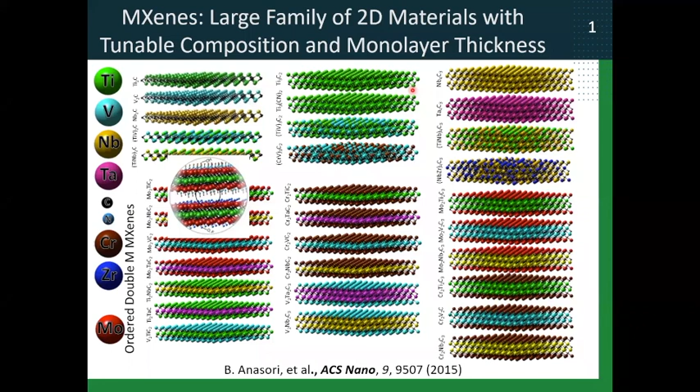We used modeling and molecular dynamics to measure mechanical properties of MXenes. This is what we started with about 6 years ago, and at that time there was no parameterized force field for MXenes.

Now we can use ReaxFF, but at that time we started to play with a combination of different potentials. For example, we used embedded atom potential for titanium-titanium interactions. Titanium-carbon interactions we described by a combination of Lennard-Jones and Axilrod-Teller three-body potential. And for carbon-carbon, we used a very simple Lennard-Jones potential.

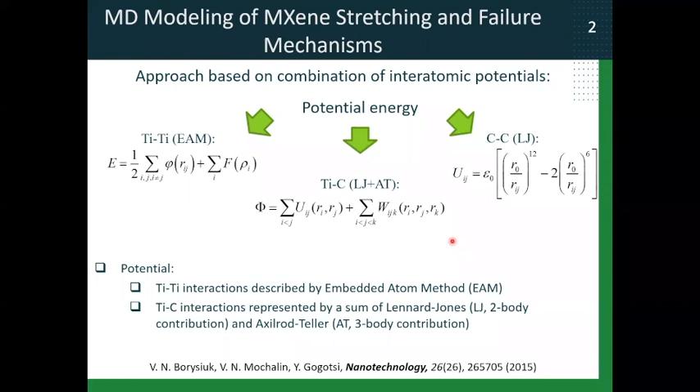So this was our functional for potential energy in MXenes, and this is our simulation setup. We used quite large sheets of MXenes, 38 by 33 nanometers. For simulation it's quite large, because the number of atoms is around 50,000 to 90,000, depending on which MXene we use. Simulations were done in an NVT ensemble, using our own in-house written C++ code.

So it's a massively parallel code. Mechanical properties were calculated using the virial theorem. For example, stresses were calculated using this expression. This is a very well known procedure.

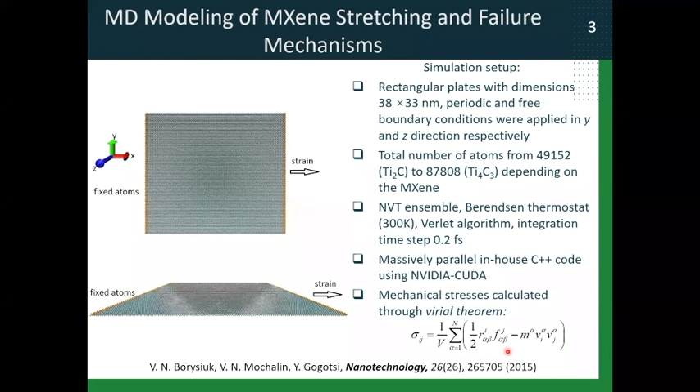The advantage of using computational modeling to simulate MXene behavior is that you have full control and full information about what is going on in your material at the atomistic scale. So here I show a movie of stretching of 3 different MXene monolayers.

Titanium 2C is on the left, then titanium 3C2 in the middle, and titanium 4C3 on the right-hand side. And you can see, even by looking simply at how they fail, of course when you stretch them, eventually they fail. The failure mechanisms are very different between these 3 MXenes.

Now, they all have the same elemental composition, it's titanium carbon MXenes, right? And the only difference between them is the variation in monolayer thickness. As I said, MXenes allow precise tuning of this.

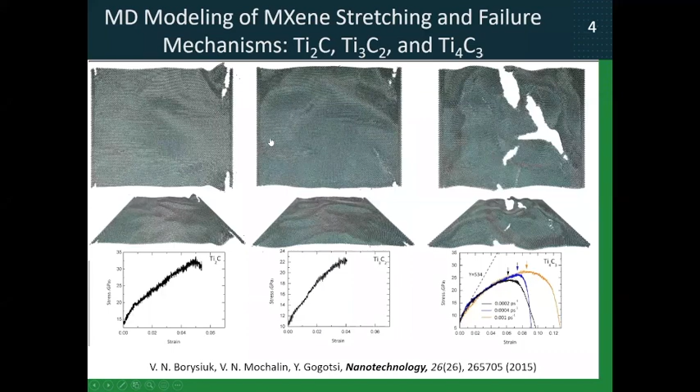And so you not only can use this modeling to get information about failure mechanisms and mechanical properties of these MXenes, but you can also use the MXenes as models of materials with precise control of monolayer thickness. So this is a very interesting aspect, which I will return to again and again in the talk, that MXenes we can also use as convenient models for fundamental studies of any property which depends on the monolayer thickness, of course including mechanical properties.

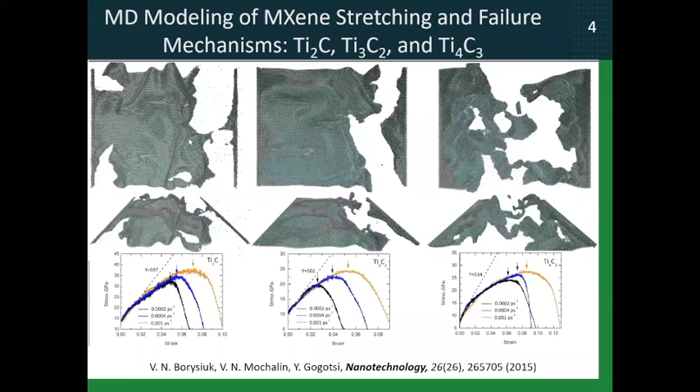Since we can measure stress and strain during this in silico experiment, we can produce stress-strain curves, and these curves give you information about mechanical properties. For example, the slope of the initial part gives you Young's modulus, and you can see the values here for 3 different MXenes.

Behavior of these stress-strain curves at different strain rates tells you something about elastic and plastic deformations of the materials. And as you can see from these curves, at lower strain rate, the materials behave more plastically. So this is what we usually observe in metals.

And this is consistent with the basically metallic nature of MXenes, because they also offer very high conductivity, and electron density at the Fermi level is very high. So this is another illustration that they behave basically as metals when you deform them, especially at low strain rates.

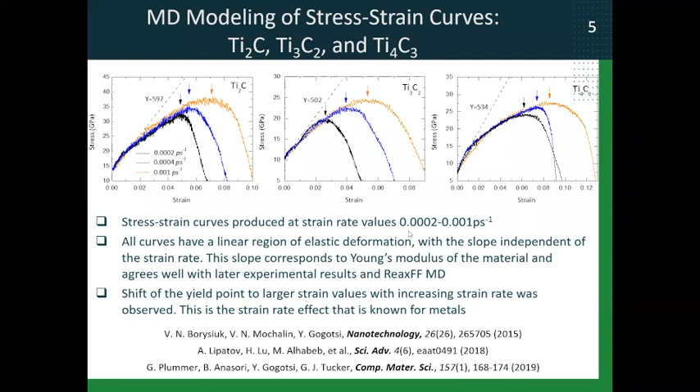So you can get information about Young's modulus and failure mechanisms, and the values of Young's modulus that I showed in the previous slide were later confirmed by ReaxFF modeling that Yuri presented last time, and also by experiments done by his group in collaboration with a group at the University of Nebraska-Lincoln.

Those were the first measurements of Young's modulus on monolayer MXenes, and the values were surprisingly close to what we predicted using this simple molecular dynamics modeling.

The next thing we also worked on using modeling was bending rigidity of MXenes. The concept of bending rigidity is intuitively very simple: if you have a very thin material, you expect it to deform very easily when you try to bend it. And when you have a thicker material, it will take more force or more energy to bend it.

So this is bending rigidity in simple words. If you want a way to calculate it, here is the equation which allows you to do so. D is bending rigidity here. And if you know the force F and displacement W, and also the length of your plate, you model your MXene monolayer as a plate, and you can calculate D, the bending rigidity, using this equation.

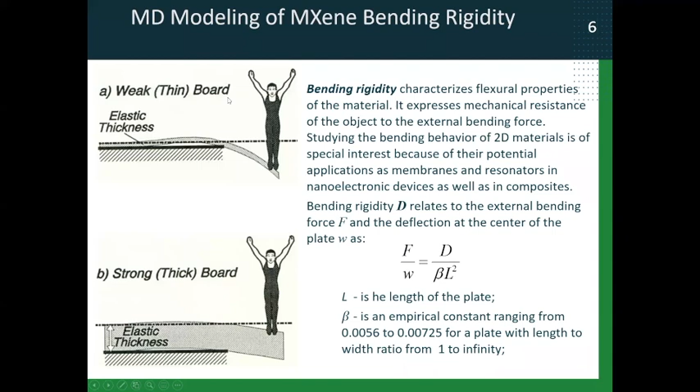And if you look at these numbers, they are much, much higher compared to graphene. Well, that is expected, graphene is a very flimsy, monoatomic layer thick material. But even compared to molybdenum disulfide, the numbers for MXenes are much higher. So MXenes are predicted to be much more rigid than other 2D materials.

And this is important, because in certain applications, especially when you want your material to maintain high frequency of vibrations for sensing, graphene is not a good choice, because graphene cannot maintain high frequency of vibrations. It will vibrate at very low frequency because it's a very flimsy material. But MXenes may be better materials for that, because they have much higher bending rigidity and are therefore expected to maintain a much higher frequency of vibration. So again, this is important for sensing.

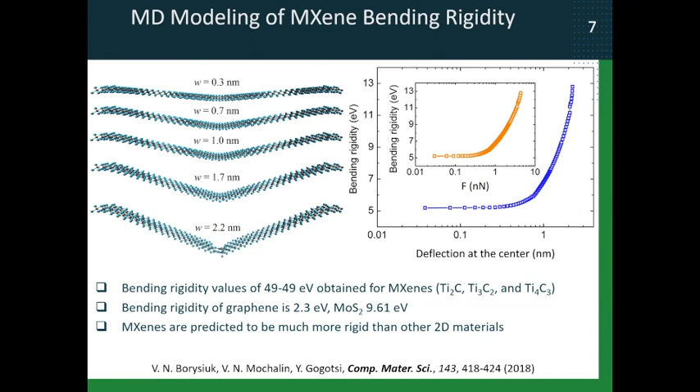So this is the part that I wanted to show you related to modeling. Now we are going to switch to experiments with MXenes.

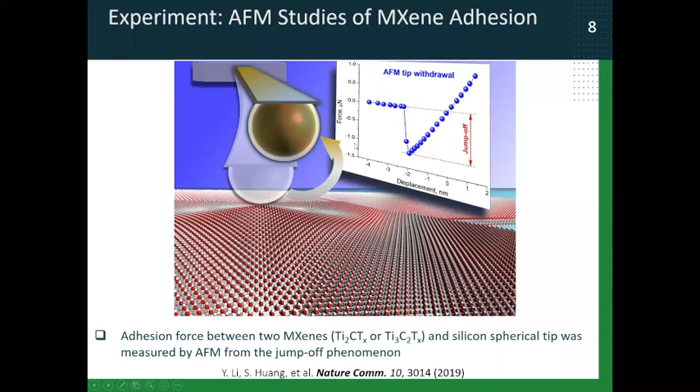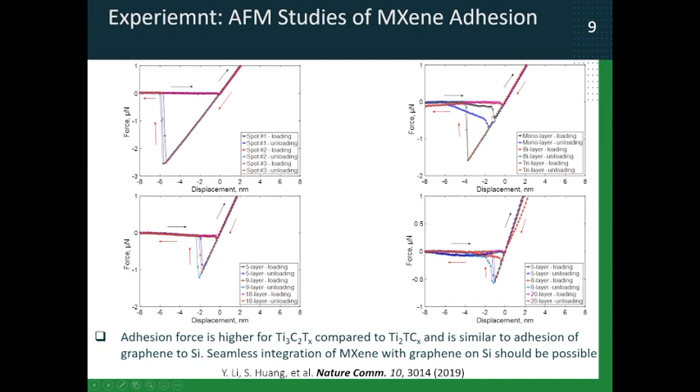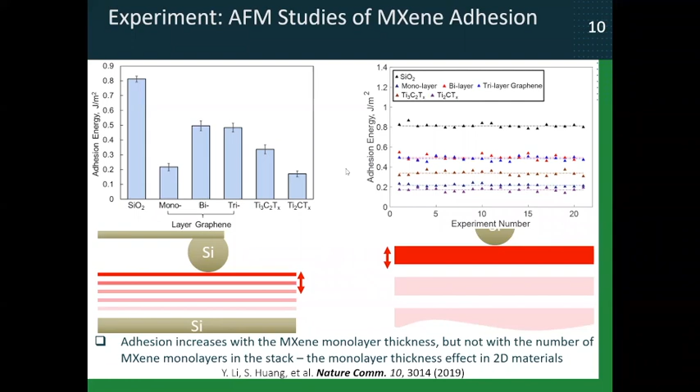We also studied properties of multi-layer MXene films, which we fabricate using interfacial film deposition. And the way we studied mechanical properties of these films was by using a device called a push-to-pull device in SEM with a PicoIndenter.

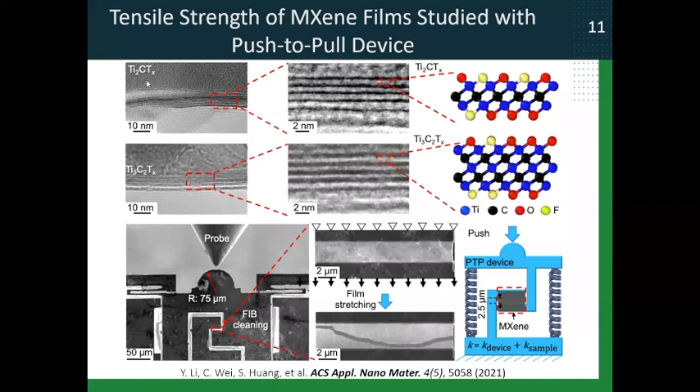So we started to look into how these stacks of monolayers fail and why they demonstrate this behavior. And again, we found out that the failure mechanism is basically a layer by layer failure instead of a concerted failure of all monolayers in the structure at once.

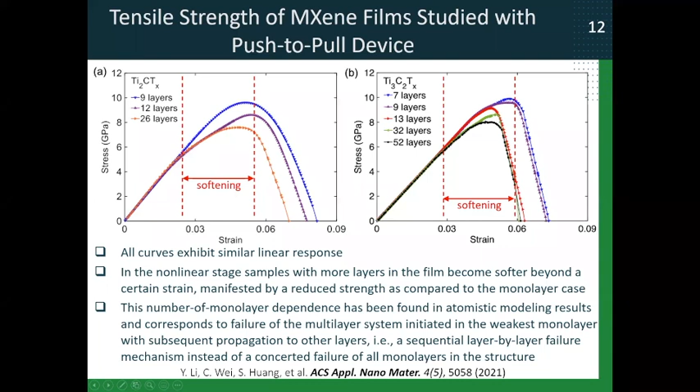And this was a reason why instead of sharp degradation of the sample, it just becomes softer, but still can maintain mechanical load. This is interesting because it tells us that we can fabricate multi-layer structures based on MXene, and we expect that these structures will demonstrate quite high mechanical properties even when they start to fail, because they don't fail all monolayers at once, they fail in sequence. We can expect that even when they start to fail, they will still maintain quite high mechanical strength.

So you know the mechanical properties of one monolayer, then you stack 10 of them, you expect that the property will be 10 times more, right? So this is additivity. But what happens with real materials when you stack them is your resultant property is usually much less than the additive property. And this is what was observed for other 2D materials.

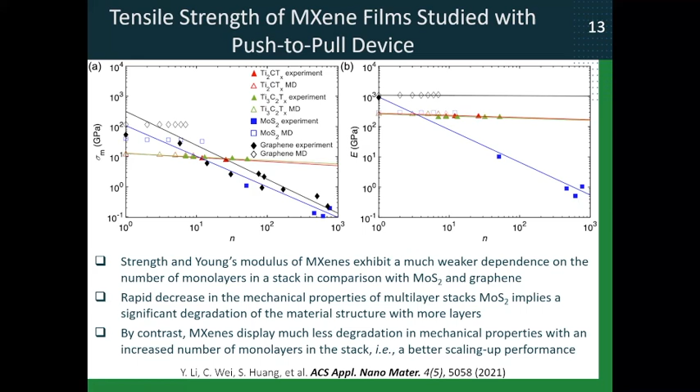And then again, we used modeling to understand the atomistic details of what happens in these stacks. We used ReaxFF molecular dynamics, and we modeled the stacks of MXene monolayers with different numbers of layers, two different MXenes: titanium 2C and titanium 3C2, with different numbers of monolayers. And again, we can calculate stress strain curves.

And indeed we observed that in the stack, say for example, when we have 10 layers in the stack, the failure starts in one layer first, and then it propagates to the next layer and the next and the next. So this is what is responsible for this softening behavior, where your material becomes softer, but doesn't fail completely. Okay, so it was confirmed with modeling at the atomistic scale.

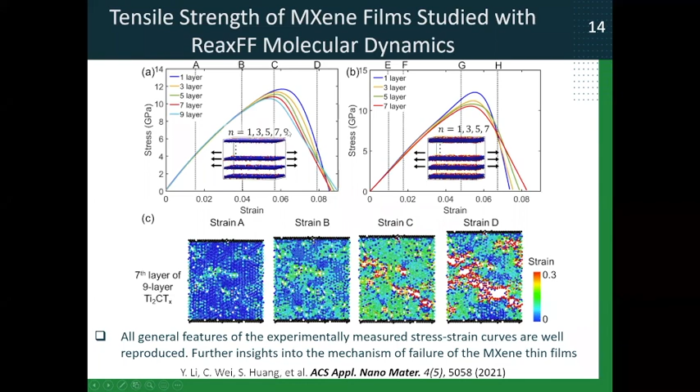And then finally, when we looked closer at the edges of the forming cracks, we found another interesting effect. And that brings us back to the very first slide about MXenes, when I said it's important to remember that the surface is coated with functional groups. And here we observe this effect of functional groups on mechanical properties.

So what happens is this: when you stretch MXene and it starts to break and you form the crack, then oxygen-containing groups, which are attached to titanium atoms - oxygen is a two-valent element, it prefers to form two bonds, right? When you start to separate titanium atoms between the edges of the growing crack, what oxygen does is it basically connects one titanium atom on one side of the crack to another titanium atom on the other side of the crack.

And in this way, it also maintains mechanical stability of this material. So this is another reason which may lead to softening behavior, but not abrupt failure as you would expect for graphene, for example, or other 2D materials which do not have these functional groups on the surface. So the presence of functional groups on the MXene surface becomes important in the mechanisms of failure of these materials. Okay, so this is another insight from modeling.

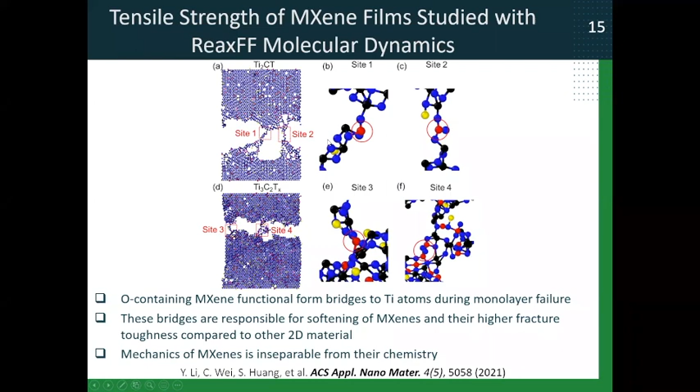These are the data we observed when we tested these films in dry nitrogen atmosphere. I have to tell you this first: when we tried to test these films in just ambient air, nothing interesting happened. They degraded fast and the performance was nothing impressive. But then when we switched to dry nitrogen atmosphere, we started to observe very interesting effects.

Here is the coefficient of friction for bare silicon without MXene. And here is what happens when we deposit a thin layer of titanium 3C2 MXene on that silicon wafer and test it. You see that when we deposit MXene on silicon, the coefficient of friction after initial run-in drops below 0.01 and stays at that value for the whole duration of testing, until the coating eventually fails here at around 3000 seconds in this case.

This value below 0.01 corresponds to superlubricity. So this is the coefficient of friction of this MXene film, and this is the coefficient of friction of just bare silicon. And then we also coated

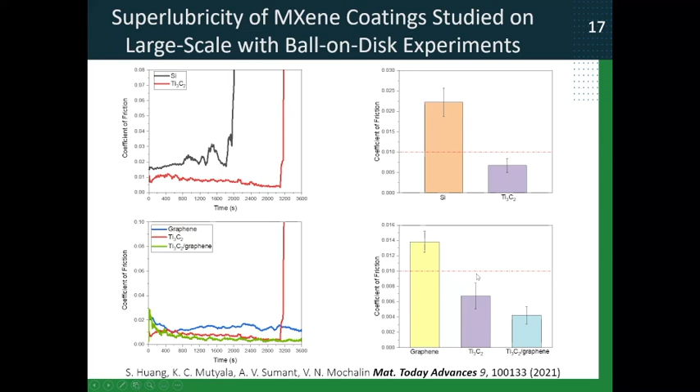MXene film with a film of graphene, and interestingly, we observed the same superlubric behavior. Now it's this green curve, but the film maintained its performance for much longer time compared to the original film. So again, this is the coefficient of friction of the MXene-graphene coating, still in the superlubric region, but now we also have other benefits.

For example, addition of graphene also reduces wear of the ball. So this is the wear of the ball which was rubbed against MXene coating. This is against silicon, of course, very large wear. MXene less, but still quite large. When we add graphene, the wear becomes very small.

So the data are also shown here: ball wear rate. MXene itself shows this value, but when we add graphene to it, the value becomes much less. And importantly, we still maintain the superlubric behavior offered by MXene. Graphene itself did not show superlubric behavior in these experiments, but when we coated graphene on the MXene film, we achieved both superlubric behavior due to MXene and very low wear rate due to graphene.

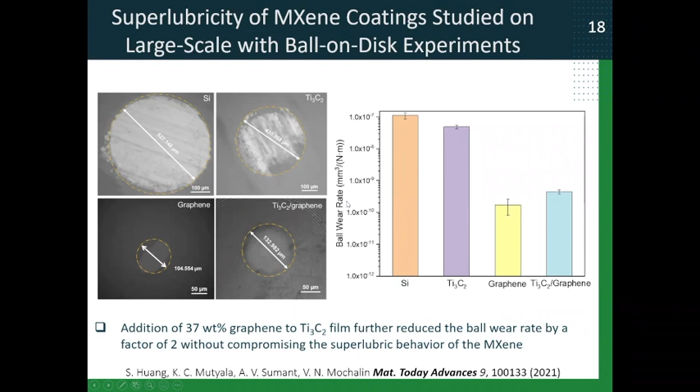So we observed, again, superlubric properties in the atmosphere devoid of oxygen and humidity. And addition of graphene also protected the MXene film and reduced ball wear rate.

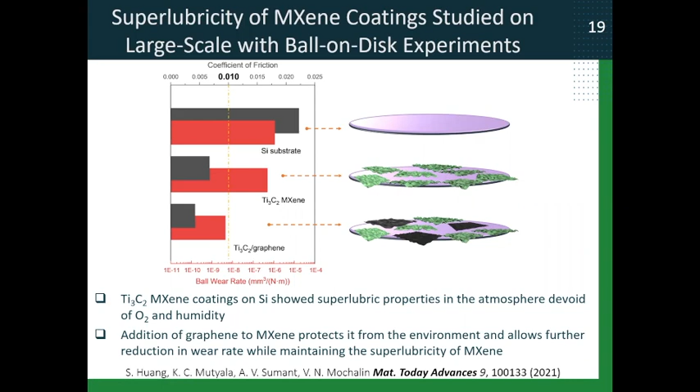Now, when I say protected, what do I mean? Well, this brings us back to understanding why MXene did not demonstrate superlubric behavior in just ambient atmosphere, because we hypothesized that MXene may actually react with humidity and air in the environment. Over the past few years, we looked extensively into the chemistry of these interactions, and it turns out that yes, MXene does react directly with water, which we call hydrolysis, and it can also be oxidized by air.

This is another big part of research activities in my group, which I am not going to cover, but if you are interested, just go and read these papers.

This is just an example of how to suppress hydrolysis. If you simply change water to a non-aqueous solvent, then your MXene becomes much more stable, even if you saturate this solvent with pure oxygen, compared to water. Even when you degas water with argon, MXene degrades quite fast in water.

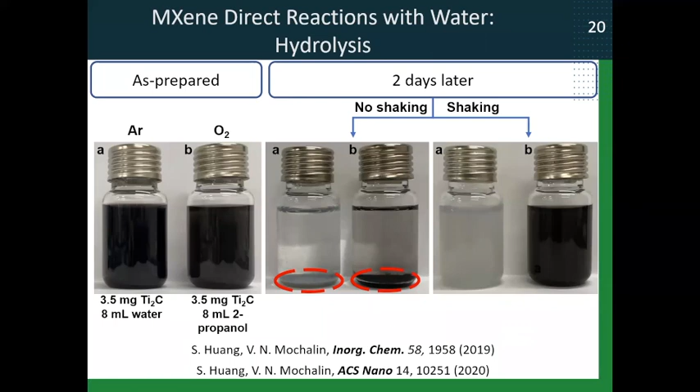So it makes sense to protect MXene with graphene if you want to use it in ambient environment.

Actually, when we published this work, it was around the time when Perseverance rover landed on Mars. I thought this is a perfect example where you can use these properties of MXene as a super lubricant, because when you are in space, you don't have water and you don't have oxygen in that environment. This is exactly an environment which is good for MXene to demonstrate superlubricity. Even on Mars, you don't have much oxygen and not much water to degrade it. So this may be one of the best materials for lubrication in space, where many other lubricants fail.

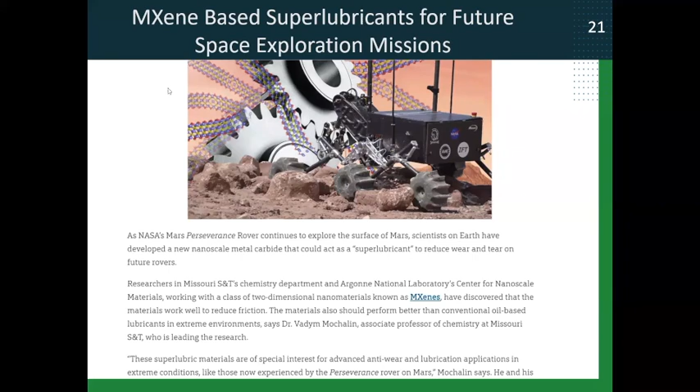This brings me to the conclusions of this talk. First of all, I introduced again MXenes as a large family of 2D transition metal carbides and nitrides, which opens up a huge playground in mechanics, tribology, and mechanochemistry of materials. Remember that we can do many fundamental studies, and they will benefit if we use MXenes for them, benefiting from precise tunability of monolayer thickness, elemental composition, and surface chemistry.

From the standpoint of applications, what we know now about MXenes is this: they have quite high Young's modulus and fracture toughness, and show better scaling up behavior compared to other 2D materials, which makes them actually interesting candidates for composites, coatings, basically any structural applications.

They also have a beneficial and tunable adhesion with other 2D materials and with silicon, which makes them ideal materials for fabrication of heterostructures for optoelectronic applications. Again, no stress due to mismatch in adhesion.

And finally, superlubricity of MXenes is very interesting because it's maintained in extreme environments, which makes these materials promising candidates for applications, say, in space exploration.

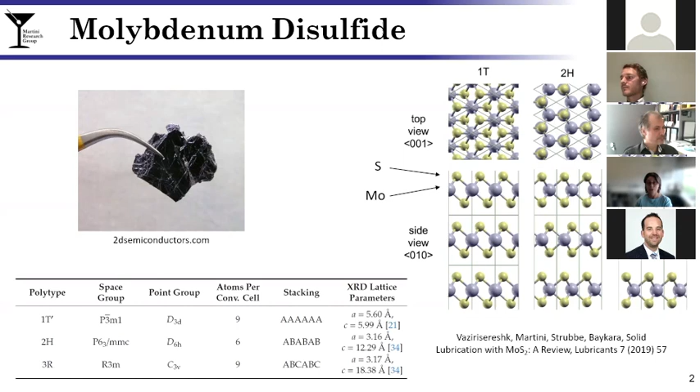But from a tribological standpoint, which is my main focus, the key feature of MoS2 is the layered structure. Like other two-dimensional materials, MoS2 has strong covalent bonds within the layers between the Mo and the S, and relatively weak interactions between the layers. This enables the material to slide, to shear relatively easily between those layers at the weak bonds.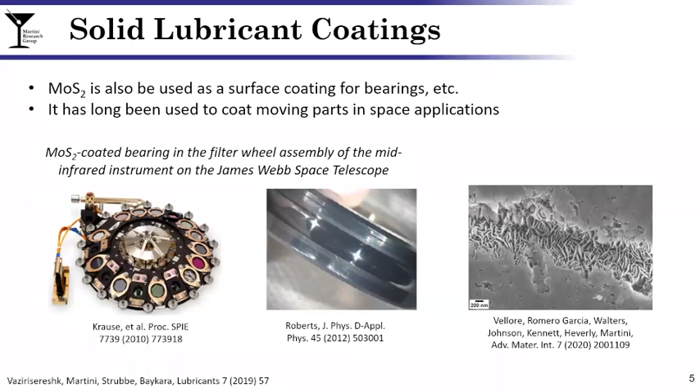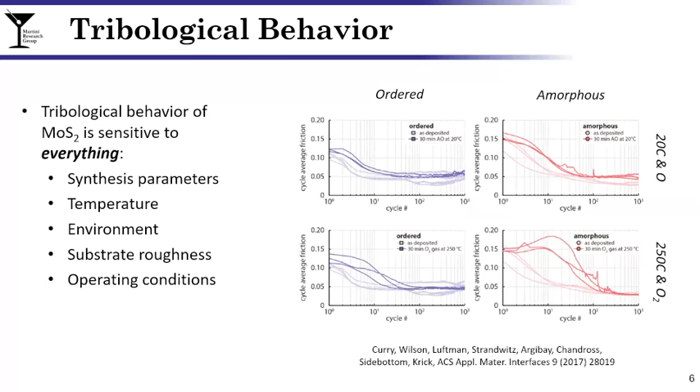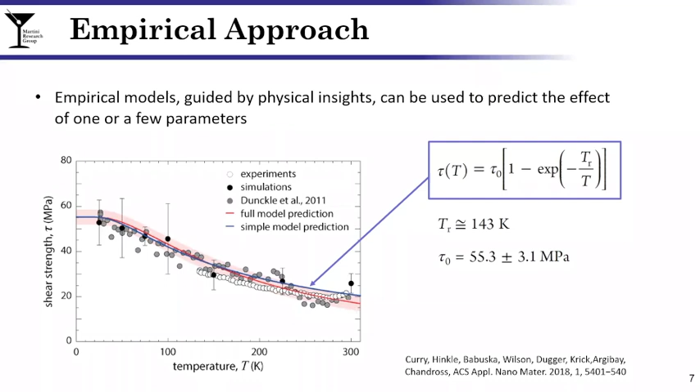However, to complement experimental measurements and empirical modeling, another complementary approach is to break down this very complex system into a fundamental single unit of tribology. If we think back to that bearing I showed a few slides ago, the actual contact is comprised of many different asperities. If we break that down and focus on just one single asperity, the premise is that if we can understand MoS2 sliding behavior at the single unit of friction, perhaps we can extrapolate that information upward and complement empirical modeling for design purposes.

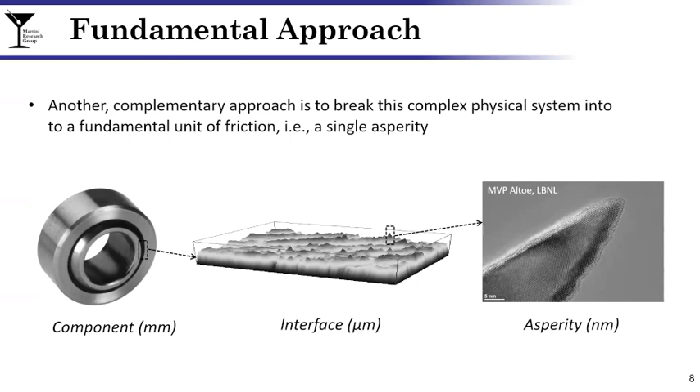In terms of research, single asperity studies are realized primarily using two tools. The experimental tool is the atomic force microscope, where we have a nanoscale probe sliding along the surface, and that nanoscale probe is your single asperity. I'll mention that the AFM results I'm showing today are from Rob Carpick at UPenn. The AFM experiments are often complemented by molecular dynamics simulations of the apex, or just the bottom of the tip, and the surface on which you're sliding. Together, these two research tools can be used to fundamentally understand friction at the atomic scale.

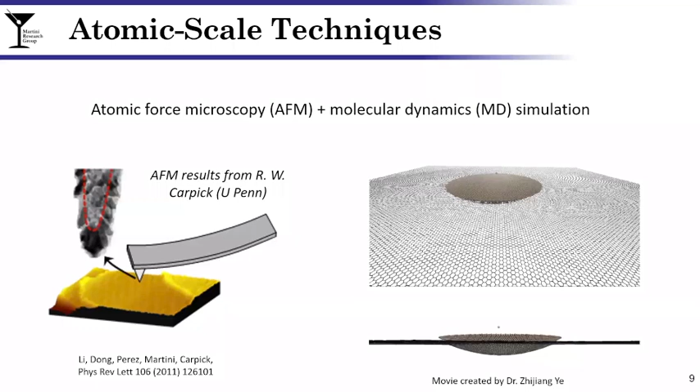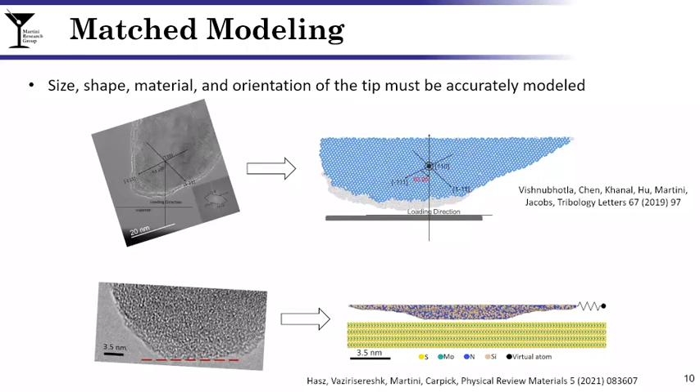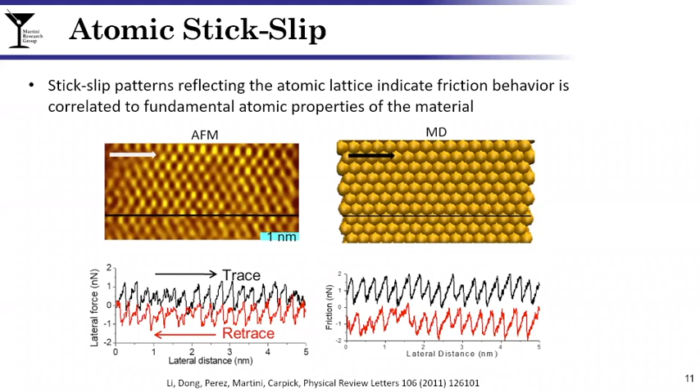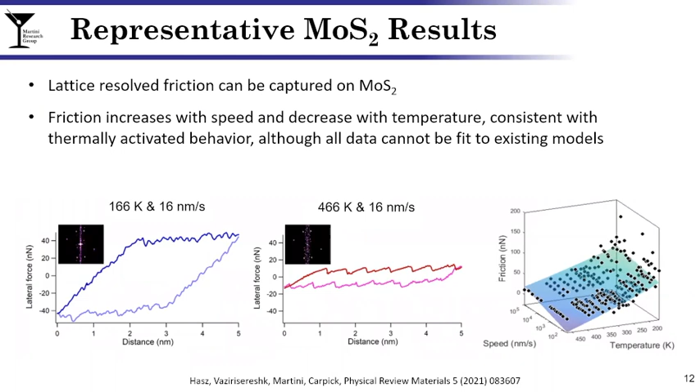We repeated this experiment in all the different possible sliding directions. We expected six low friction directions based on the six-fold symmetry of the MoS2 crystal structure. But instead, in both experiments and simulations, and on both bulk and monolayer MoS2, we saw only two low friction directions. This was quite confusing to us because we're trying to connect friction to atomic structure, and we see some seeming discrepancy here.

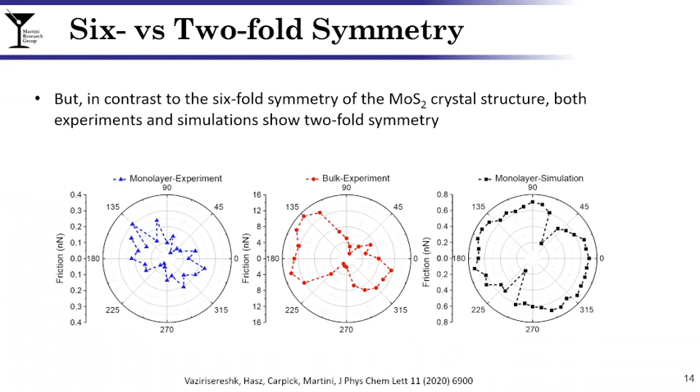To understand this, we looked at potential energy surfaces. These colorful schematics on the left show the potential energy of the MoS2 surface. The one on the left is the ideal structure, where red is high energy corresponding to the positions of the sulfur atoms in the topmost layer. You can see that there should indeed be six ways you can go from the center line and get low friction.

However, recall that friction is not just one material, it's two things sliding relative to one another. So we recalculated the potential energy surface using the model tip in the simulation and found a very different story. Specifically, the tip breaks the six-fold symmetry, leading to two directions of low energy corresponding to our two directions of low friction. So it seems that surface energy, something fundamental about the material, plays a very important role and potentially is a link between friction and the atomic nature of materials.

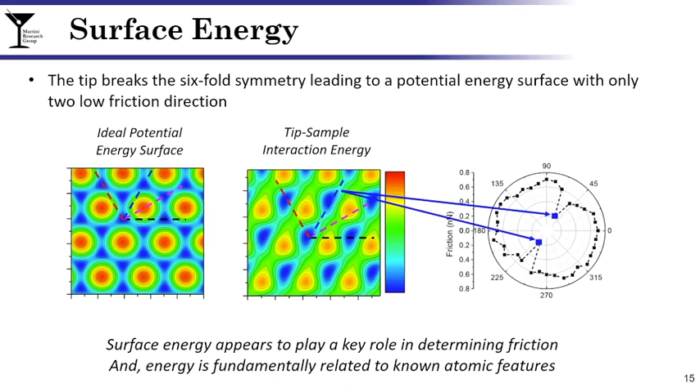To take this one step further, we did a study comparing MoS2 and graphene, or graphite. These are the two prototypical two-dimensional materials, and indeed the ones used in practical applications today. We wanted to do a head-to-head comparison so we could differentiate between their frictional behavior and correlate that to differences in their fundamental structure. This study was made possible by samples synthesized at Charlie Johnson's group at the University of Pennsylvania.

On the left are optical images of these samples, showing that they deposited both graphene and MoS2 on a silicon substrate. This is a very powerful and exciting sample because, looking at the close-up view on the right, along the scan line drawn in blue, you can slide the AFM tip along one direction and cover MoS2 on silicon, MoS2 on graphene, and graphene on silicon. So we can really do a head-to-head comparison between graphene, MoS2, and them together, which I'm calling here a heterostructure.

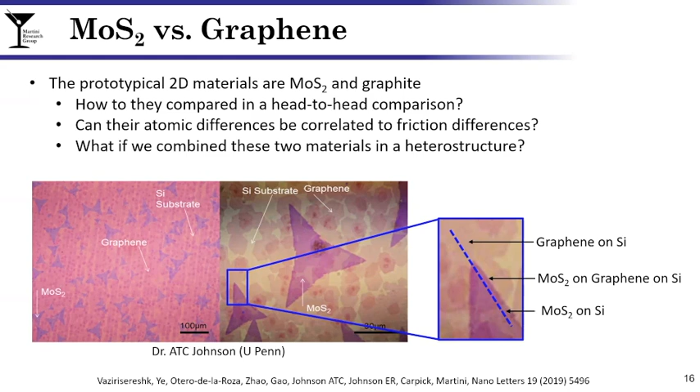Shown here are the results of one such measurement. On the left are the experiments, on the right the simulations, and the friction corresponds to the line you're looking at. What you can see right away is that both in the simulations and the experiment, there's higher friction on the MoS2 than the graphene. Maybe there's a bit of difference in the heterostructure, but it's not evident in this particular analysis. Still, we can see right away that there's some contrast between the MoS2 and the graphene.

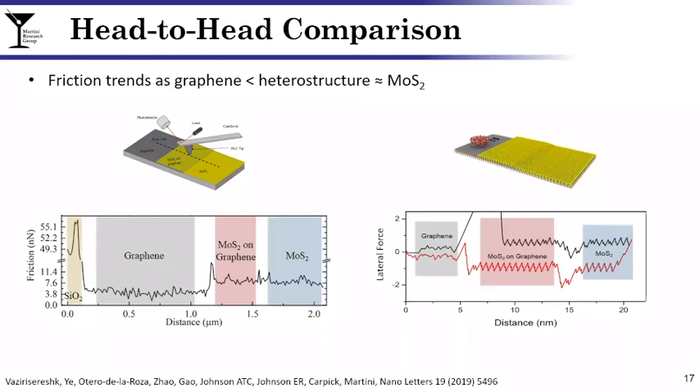This was repeated along multiple scan lines in the experiments and at many different loads. What I'm showing now, again left is experiment and right is simulation, is the comparison of friction as a function of normal load between the MoS2, the graphene, and the heterostructure. You can see that across all loads, the MoS2 has higher friction than the graphene. And in some cases, within the error of either the experiments or the simulations, the heterostructure has slightly lower friction than the MoS2.

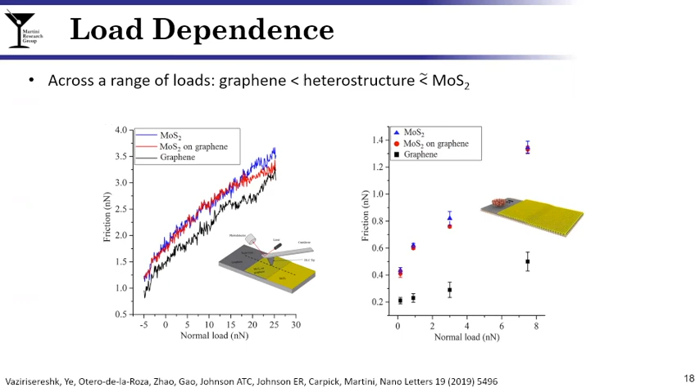To explain this difference, we're trying to use energy as the link between friction and atomic features. We looked at our potential energy surfaces. The colorful images are the energy maps, and the lines below them are a line profile across the high energy barrier. We can see from our empirical potential in the MD simulations, there's a higher energy barrier for sliding on MoS2 than on graphene.

This is an empirical model, so we obtained corroboration from density functional theory calculations performed by Erin Johnson's group at Dalhousie, shown on the right. In this case, the DFT approximated the tip as a methane molecule, and you see two different orientations. In both cases, the energy barrier for sliding is higher for MoS2 than graphene.

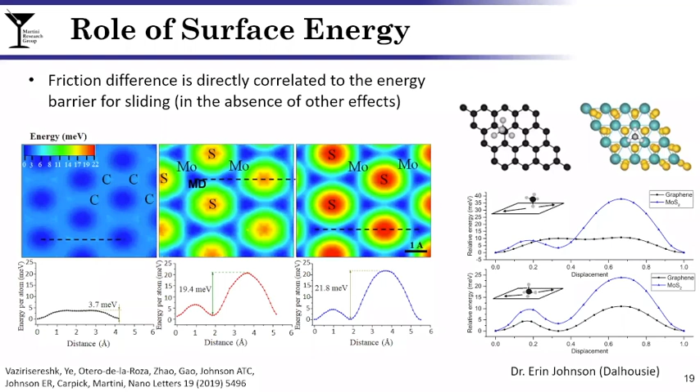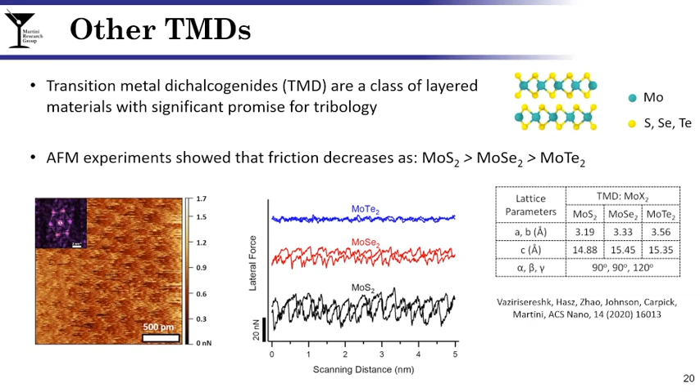We analyzed all sorts of different possible explanations for this—contact size, substrate deformation, force distributions on atoms. None of them really explain this somewhat surprising trend.

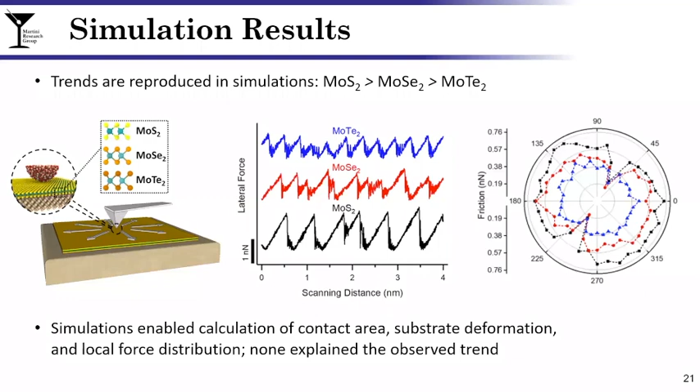So we came back to our potential energy surfaces. What I'm showing you here, the colorful pictures are the potential energy surface—the convolution of the model tip and the substrate, where red is high energy and blue is low. The black line is the trajectory of the tip as it moves over the surface, and below you can see the corresponding lateral force or friction trace.

There are two key points to note here. First, the difference between the maximum and minimum energy—the energy barrier height—on all three of these TMDs is about the same. But secondly, the tip doesn't actually go over the high energy barriers. Rather, it goes around them and crosses at the saddle points.

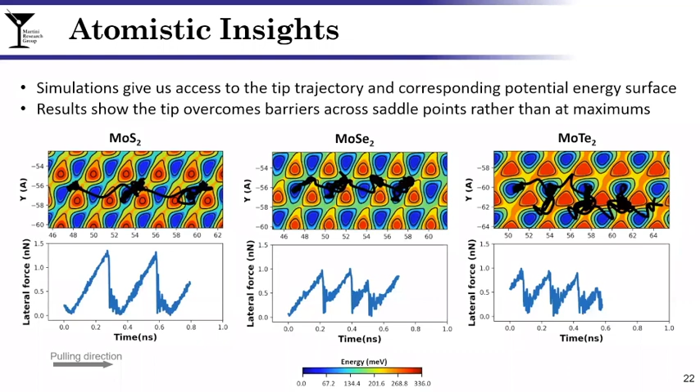We then compared directly the energy at the saddle points. On the far left, you're looking again at those potential energy surfaces. The black lines are the tip trajectories, and we analyzed the energy at the position where the tip actually moved. You can see in the middle figure that even though the height of the barriers was about the same, for MoTe2 the width of the saddle point was the largest. This can be directly correlated to the fact that MoTe2 has the largest lattice spacing.

So what we're seeing here is that among these three transition metal dichalcogenides, they have similar structures and similar energy barriers, but because of the width of the saddle caused by the lattice spacing, it's easier to move forward on MoTe2, resulting in lower friction.

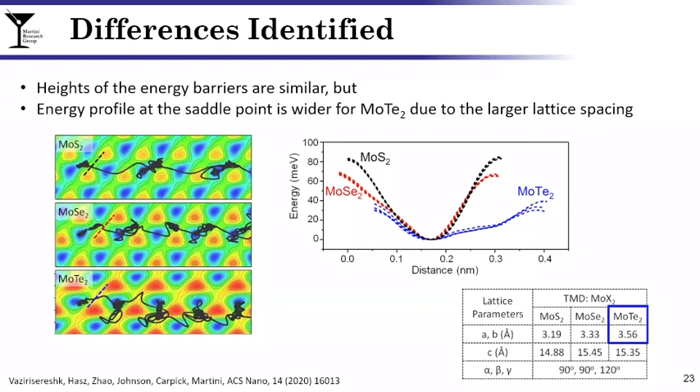To try to generalize this trend, we turn to the Prandtl-Tomlinson model. For those who may not have heard of this, it's an approximation or simplification of an AFM experiment in terms of a point mass being dragged along a potential energy surface by a harmonic spring. There are very few parameters in the model: the speed, the spring constant, and the two most relevant to our study—the height of the energy barrier U and the lattice spacing A.

Recall that our tip didn't move along a straight line, so we extended this to a two-dimensional Prandtl-Tomlinson model. It's basically the same as the one-dimensional version, except the sinusoidal profile goes in both directions, and again we're capturing the height of the barrier with U and the lattice spacing with A. Just a quick note that these were done using MATLAB codes available in the supplemental material of the reference shown on this slide, in case you want to repeat the experiment.

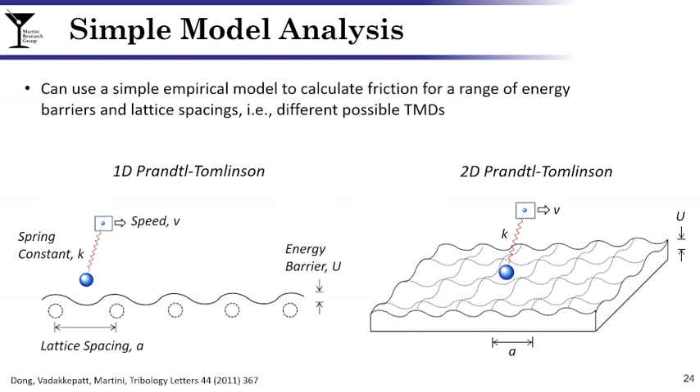I titled this presentation MoS2 and Beyond, so let me quickly do the beyond part. The study I just showed you already probably has your mind turning about the possibilities for transition metal dichalcogenides. In this TMD family, we only looked at three of them. However, there are many possible combinations of metals and chalcogens you can put together in this similar structure, getting layered materials that give us a dial one might be able to turn to achieve designer transition metal dichalcogenides. If we can understand how the energetics and lattice spacing affect friction at the fundamental scale, we can slowly turn this knob to achieve the friction behavior we wish to have.

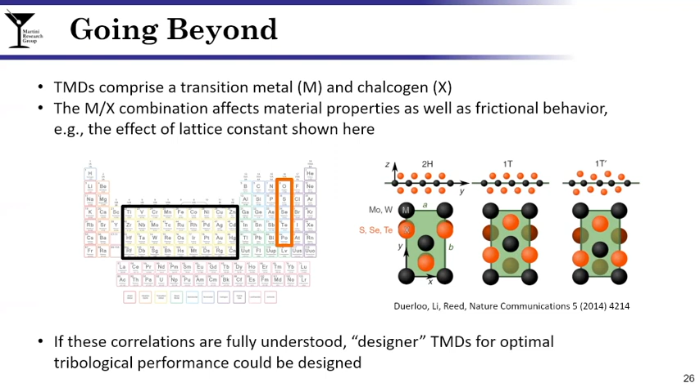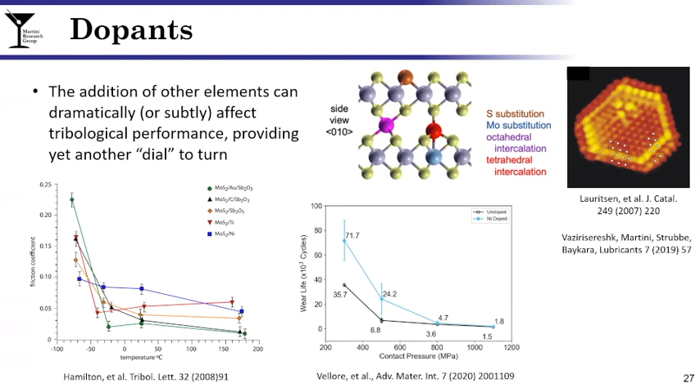On the left image, you're looking at friction as a function of temperature, with MoS2 having various dopants. Quite interestingly, this shows that if you're looking for high temperature behavior, perhaps you'd want a gold dopant, the green line here. But if you're looking at cold temperature behavior—again, back to the example for space applications—then you might be looking for a nickel dopant. So with very small concentrations of elements, we're completely changing the profile. In the middle figure, you're looking at wear life, how long it took for coatings to fail. In this study, we found that particularly for low contact pressures, the addition of a nickel dopant in very low concentrations dramatically increases the life. So this gives us another dial to turn to change or tune tribological performance.

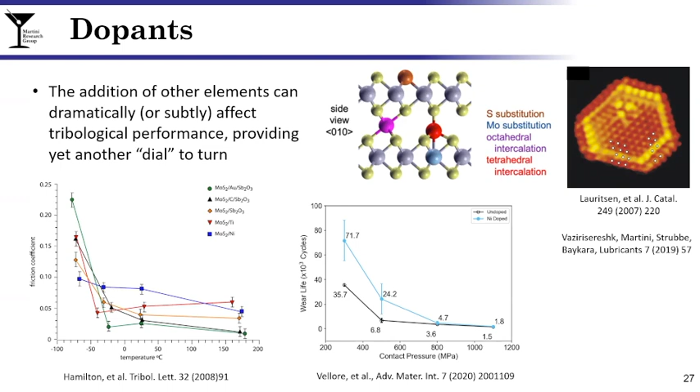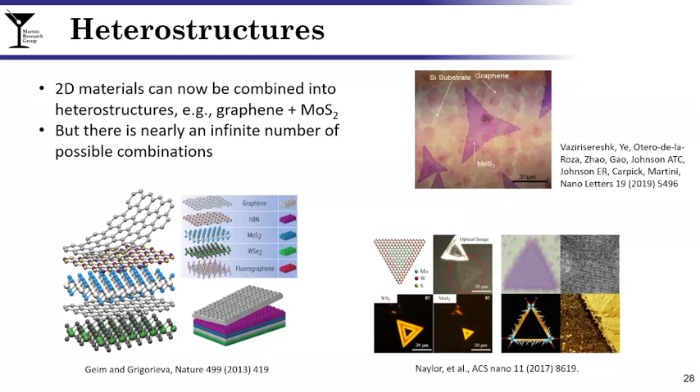To wrap everything up, MoS2 is already being used as a lubricant additive as well as a coating. It already lowers friction and wear for tribological applications. One of the challenges for using MoS2 and similar materials is that their performance is highly dependent on almost everything, which is a huge challenge from an engineering design perspective with all these unknowns. The approach I've presented, and I hope I've convinced you of, is that you can break these very complex things down into the single unit of friction, the single asperity, realized using the AFM and complemented by molecular dynamics. If you can understand the relationships between friction, wear, or whatever tribological property and ground truth fundamental properties of the materials—for example, the lattice spacing—then we can take one step further toward designer materials and rational design using 2-dimensional materials with very tunable tribological properties.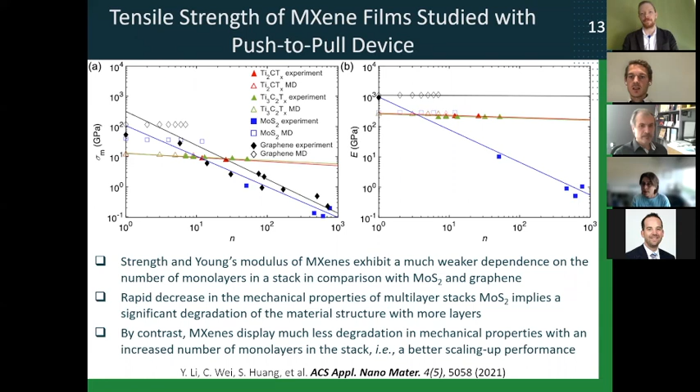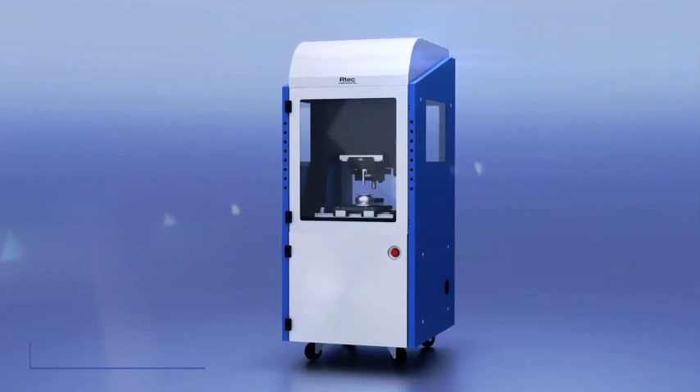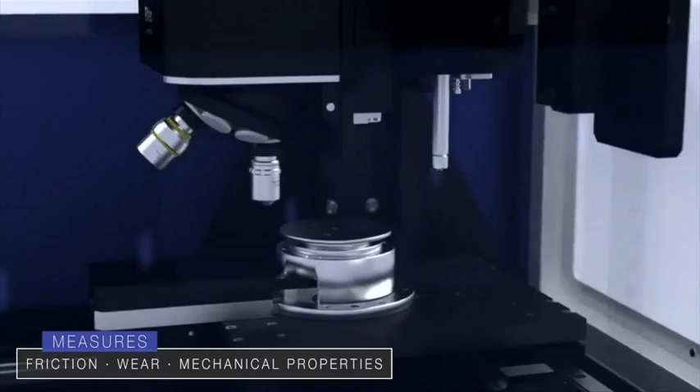Introducing the most advanced universal tribometer, the MFT 5000. With a modular architecture platform design, it is a robust surface testing instrument engineered to evaluate friction, wear, and mechanical properties of materials, as well as lubricants, over time.

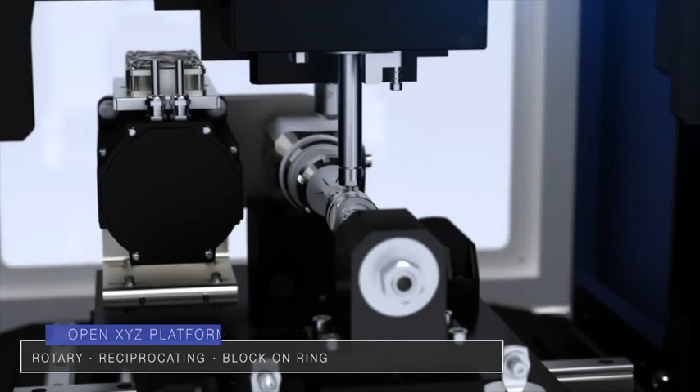The MFT 5000's open XYZ stages and wide range of interchangeable modules and sensors allow users to self-implement and add customization, combining several tribology tools all on one device. These diverse modules accomplish various motions for any application and are capable of speeds from 10,000 RPM to 500 Hz oscillation.

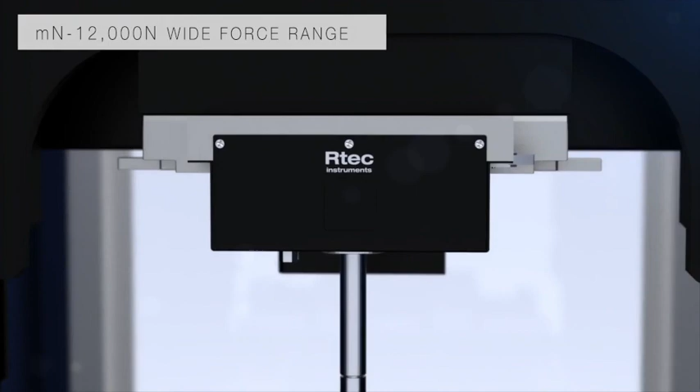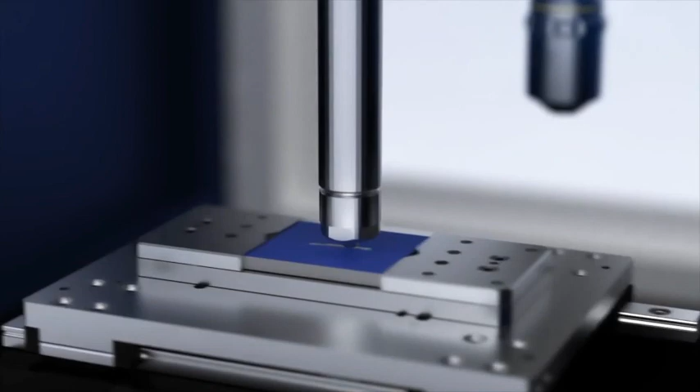The complementary sensors achieve millinewton to 12,000 Newton wide force range, with options of strain gauge, piezo, and capacitive multi-dimension force sensors. The lambda profilometer, combined with the patented inline design, coincide to analyze any surface, including glass, with ease.

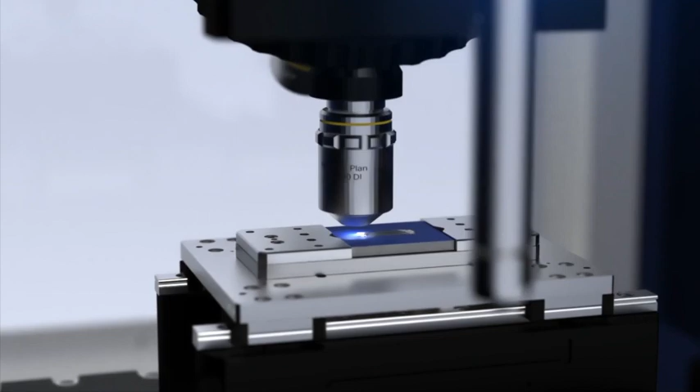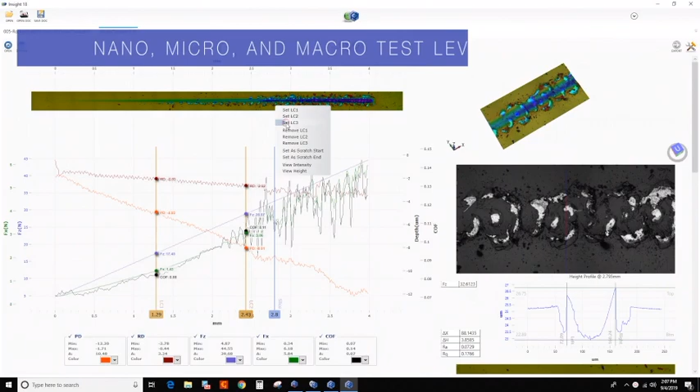Because of its unique four imaging modes, the profilometer produces 3D information by creating sub-nanometer surface images automatically. A fully automated and simple software interface integrates the data, enabling researchers to design and conduct tests at nano, micro, and macro levels. To simulate real-life scenarios, the tribometer comes with several environmental control options.

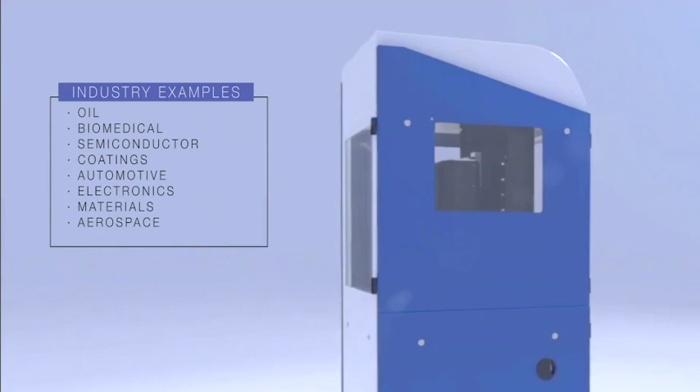That allows testing at -120 to 1200 degrees Celsius temperatures. These interchangeable chambers are skilled in evaluating high pressure, vacuum, humidity, salt spray, and tribocorrosion conditions. Due to its multiple possible configurations, the MFT 5000 is used extensively across a wide range of industries, including oil, biomedical, semiconductor, coatings, automotive, electronics, materials, aerospace, and many more.

On this platform, all types of tribology tests are possible. Rtec Instruments, leading innovation in tribology and surface test instrumentation.